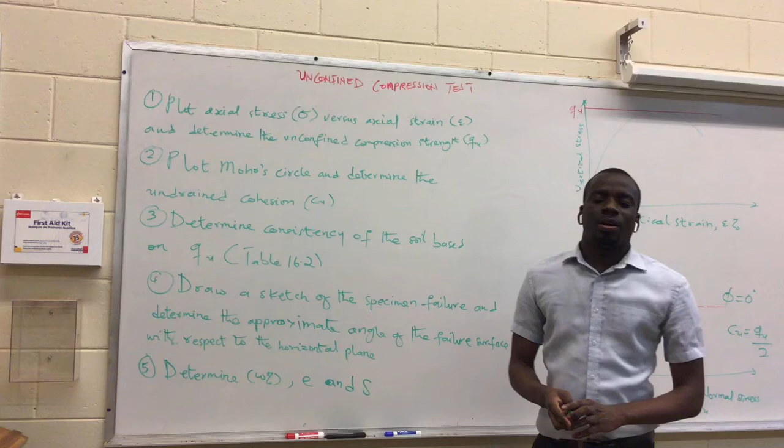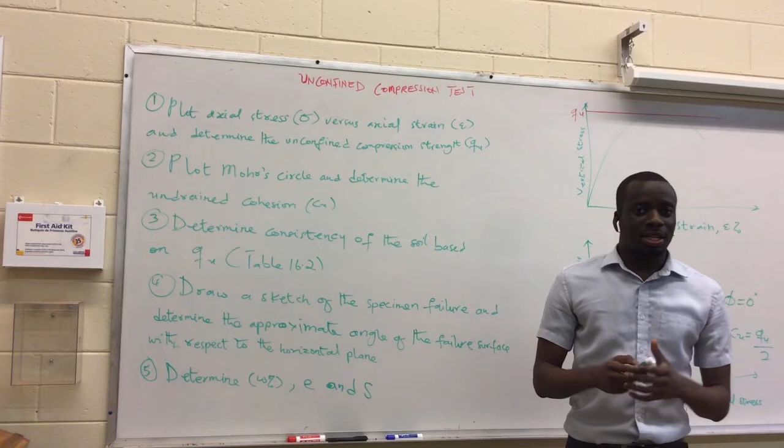Today we are going to treat unconfined compression test, and it's a modified version of the unconsolidated undrained test. So let's now go through the objectives and then get ourselves ready for the lab.

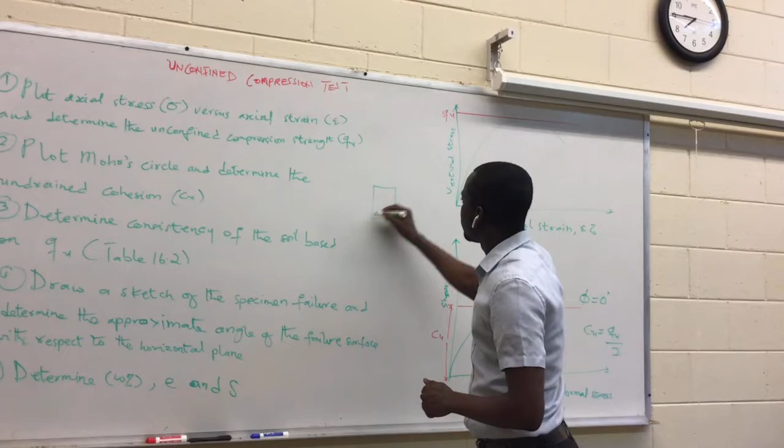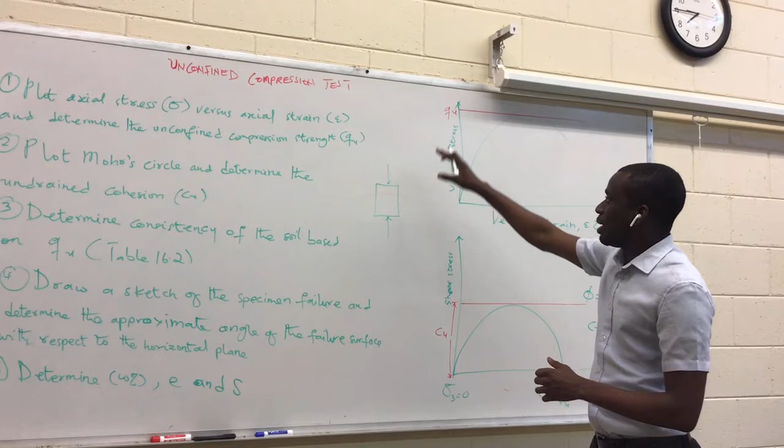The first objective says you should plot the axial stress versus the axial strain, like this. It's very simple: we have a sample that we exert a vertical pressure on without any confining pressure. Once we get that, we plot the axial stress we are imposing on the sample versus the strain it experiences. So you can see the vertical stress against the strain.

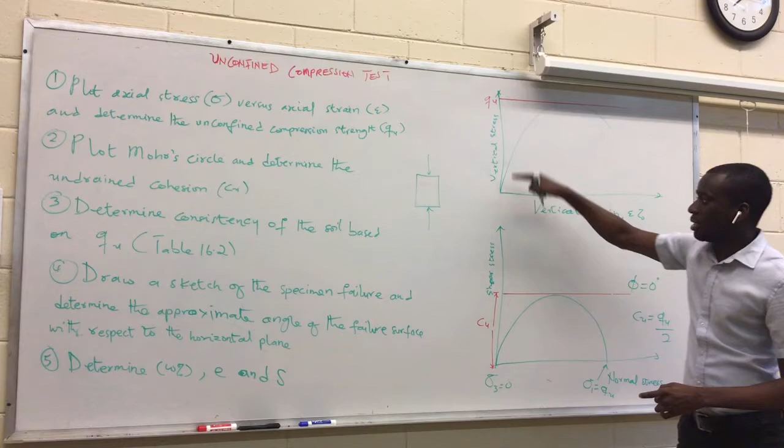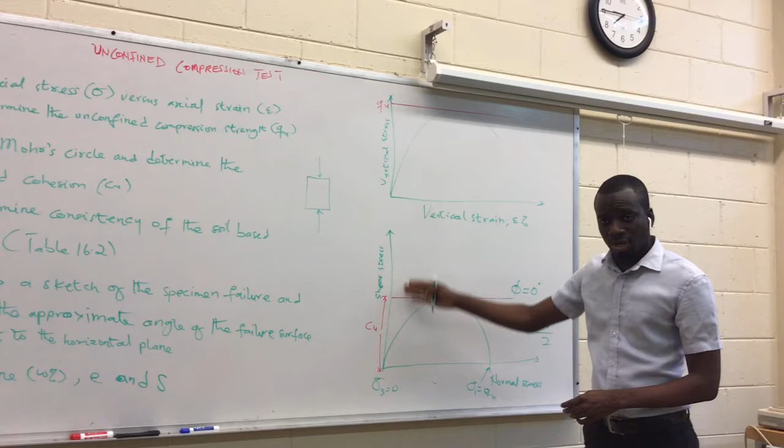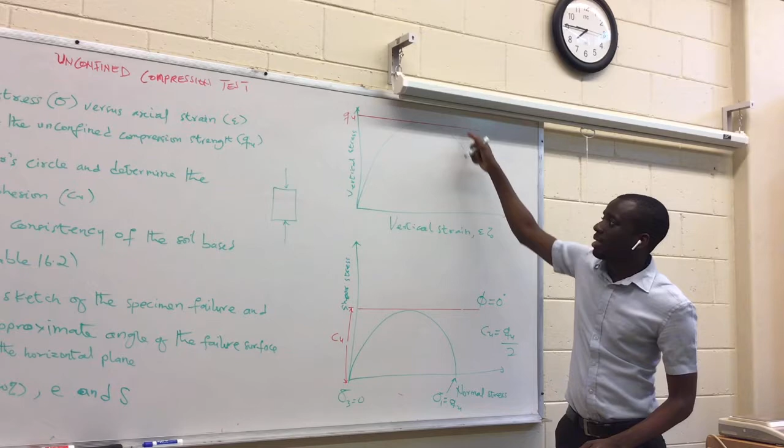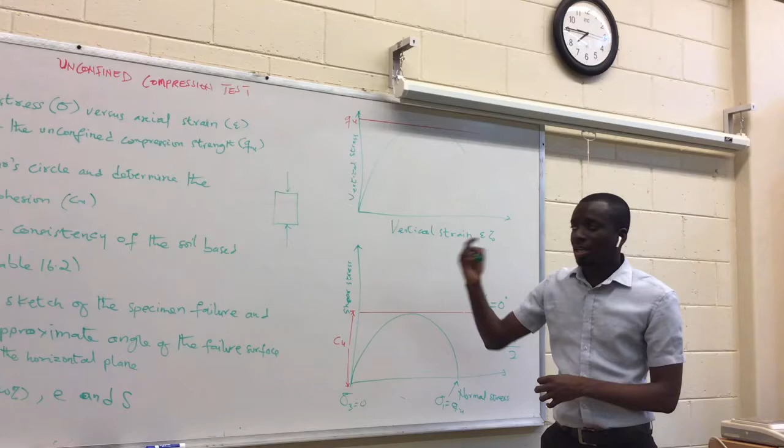Then with that, we are going to determine the unconfined compression strength, which we find in the graph of vertical stress against vertical strain. Usually the QU is the tip of the graph we are drawing, the peak of it, the highest vertical stress, which becomes our QU, or the unconfined compression strength. As we know, the strength is simply the highest stress the sample can endure before failure, that's how it becomes the peak of our graph.

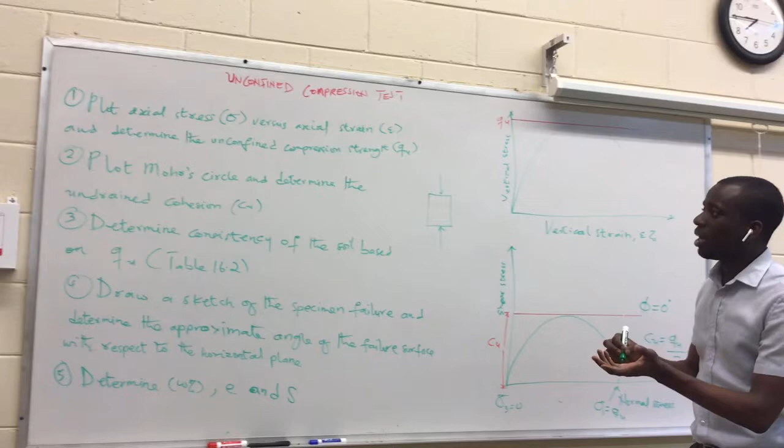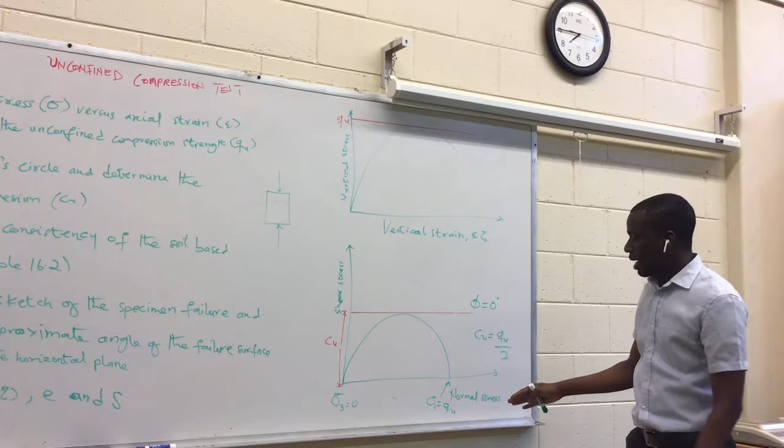Going to the next point, that's plotting the Mohr circle and determining the undrained cohesion. All you have to do is pick the unconfined compression strength, which is your QU. Then you come to the Mohr circle plot, which is shear stress versus normal stress. In that case, your unconfined compression strength becomes the diameter with which you draw this Mohr circle, because the confining pressure is 0.

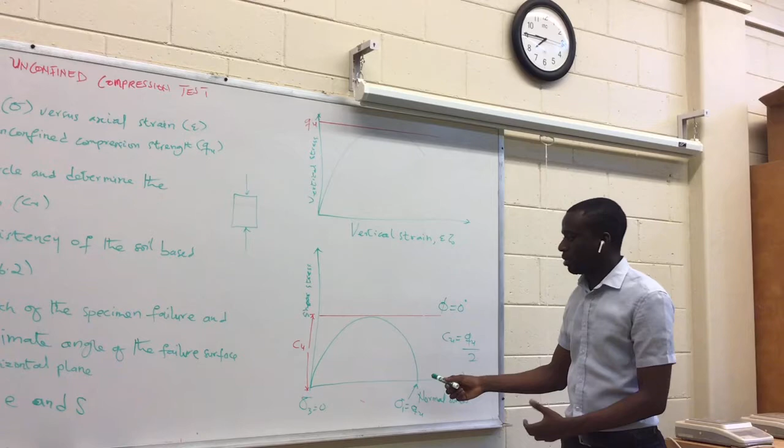That's how the sigma 3 is 0. Then this is the principal stress, which becomes your unconfined compression strength. Then you are able to draw the Mohr circle, and half of this becomes our cohesion. That's how the radius of this circle becomes our cohesion, so we just take it straight from the graph.

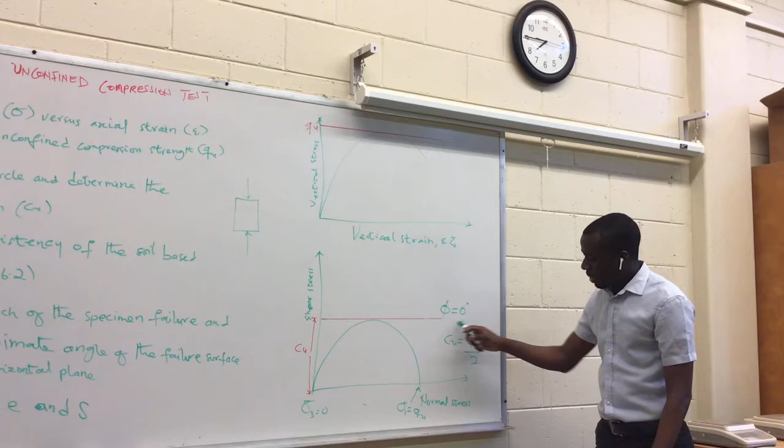This line is flat, or has a slope of 0, because the friction angle of the clay is assumed to be 0. So in this case, you have a friction angle of 0. As you can see on the board, my CU, or my cohesion, is the unconfined compression strength divided by 2, because it's simply half of that.

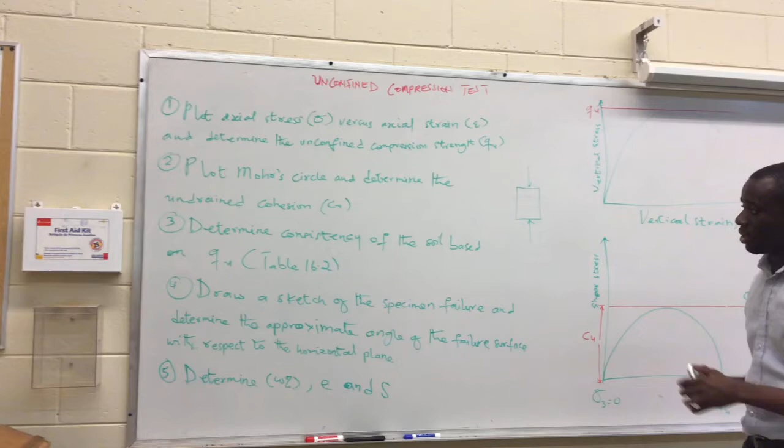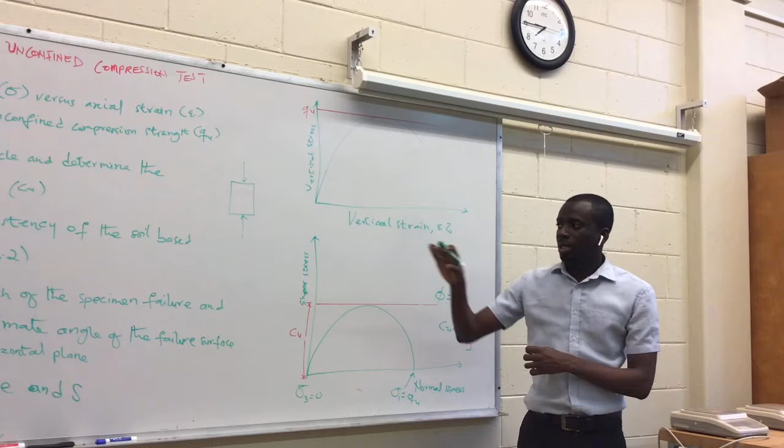Number 3 asks us to determine the consistency of the soil based on the unconfined compression strength, and there is a table that we use. You have values of the unconfined compression strength, and you match what you got to the description of the properties, and you're able to get the consistency of the soil.

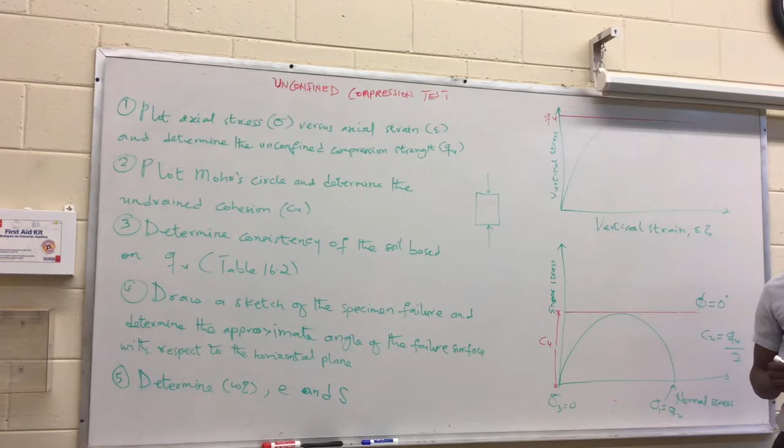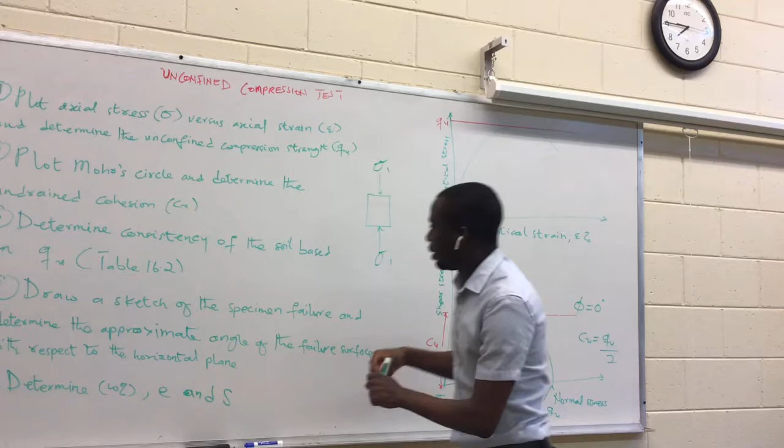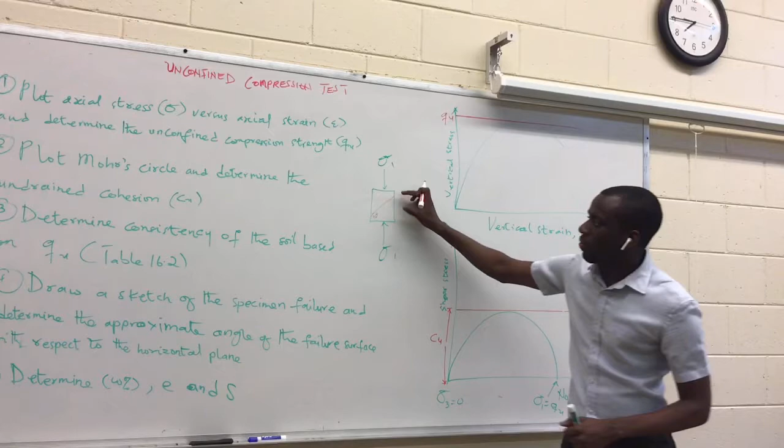Number 4 asks us to draw a sketch of the specimen failure and determine the approximate angle of the failure surface. As we continue to impose stress on this sample, it will fail along a particular line that we call the failure plane, sometimes at an angle of 45 degrees. So we are required to make sure we make notice of the orientation of the failure plane, or the angle of failure. That's what number 4 is telling us to do.

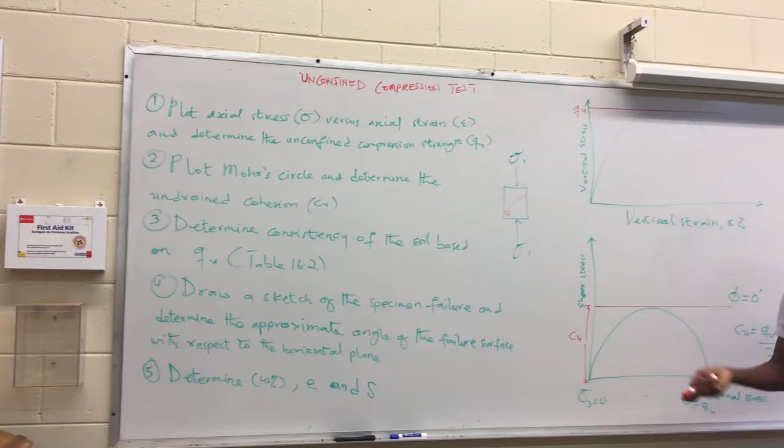Then number 5, you're supposed to determine the moisture content, the void ratio, and the degree of saturation, which we've done repeatedly in this lab. So we are just going to go along and do that as required.

Okay, so now we are at the practical section of the lab. This is my cylindrical mold, which will help me to mold the sample into a cylindrical form for us to be able to perform the test. And these are my calipers that I'll be using to measure the correct dimensions of the sample. And this is my extruder.

It helps me to extrude the sample from the cylindrical mold. This is my plastic plate, which helps me to keep the sample. Then this is my wire saw, which I'll use to trim the sample to the required shape.

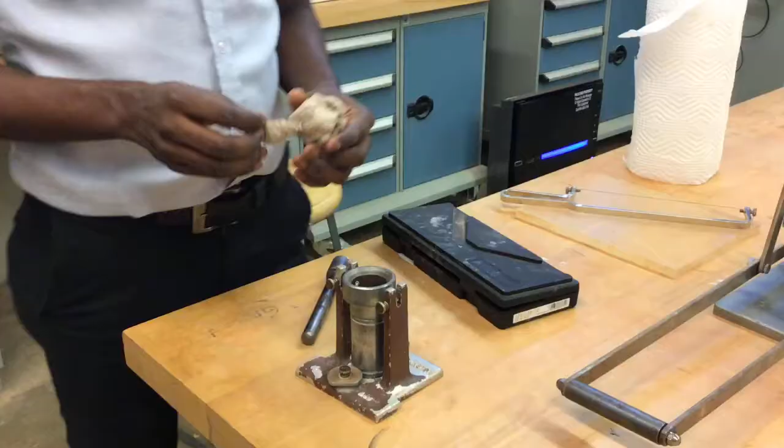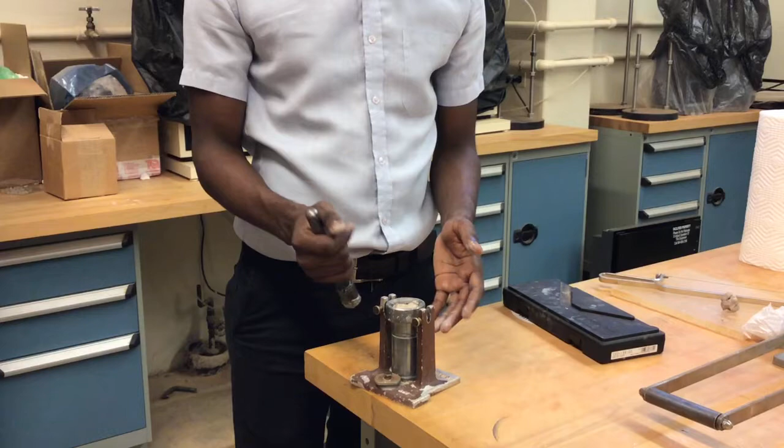Okay, so now I'm required to put the clay inside the cylindrical mold and tamp it 10 to 20 times, but in this lab we are just going to stick to 15 times. So I've already added some clay, so I'll just go ahead and tamp it. So I'm compacting my last layer, which is the third layer, and that's the same as the other layers, 15 blows.

So now that I'm done compacting the sample, we can see that part of the sample is actually extending beyond the cylindrical mold. So what I'm about to do now is to trim the sample flush with the tip of the cylindrical mold.

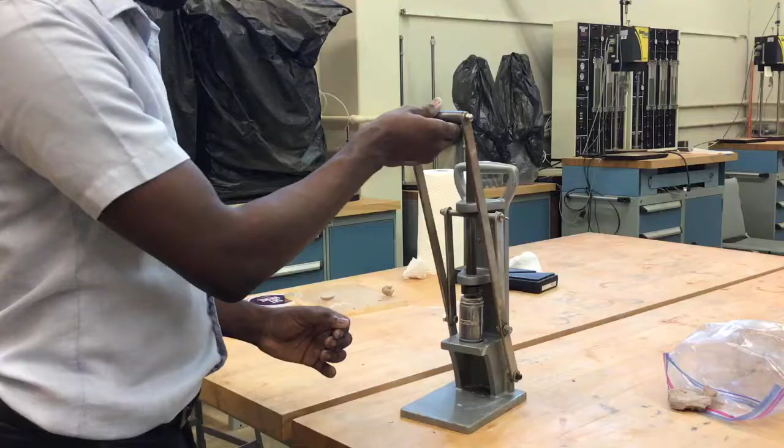Using this device to extrude the sample.

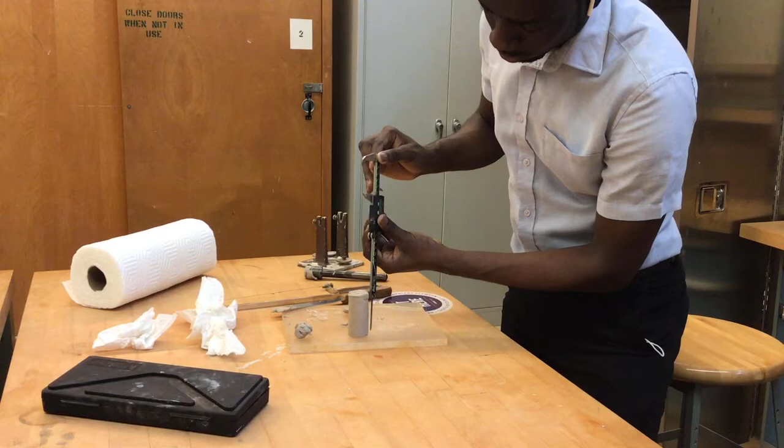So now I'm taking the dimensions of the sample. Alright, so I have my diameter. I now have my height or length of the sample.

So this is my GeoJac instrument, and then what I'm about to do now, as we've done in most of the lab, is to check to see if the instrument is well calibrated. And what we focus on are the two sensors: the deformation sensor and the load cell.

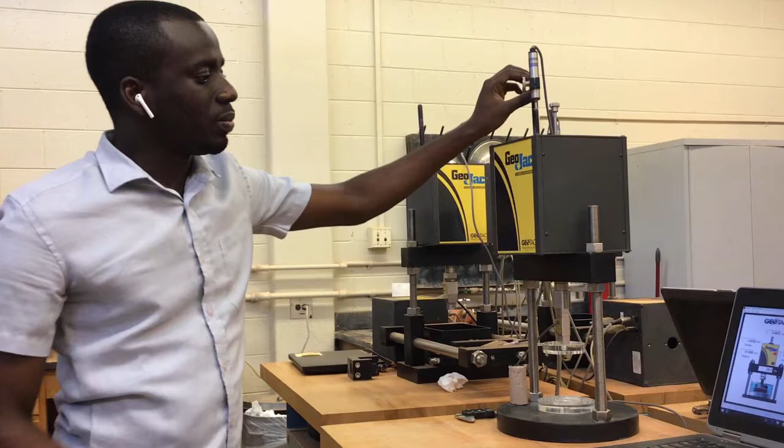So I'll check to see if it's actually zeroed, and if it is not zeroed, then we just have to go into the computer and re-zero it to make sure we bring it back to the mean position, so that any measurement we make is coming from the mean position onwards.

So we are required to make sure that the distance between the two platens is less than 2.3 inches, and I have done my measurement and I realized that it's actually correct. It's less than 2.3 inches.

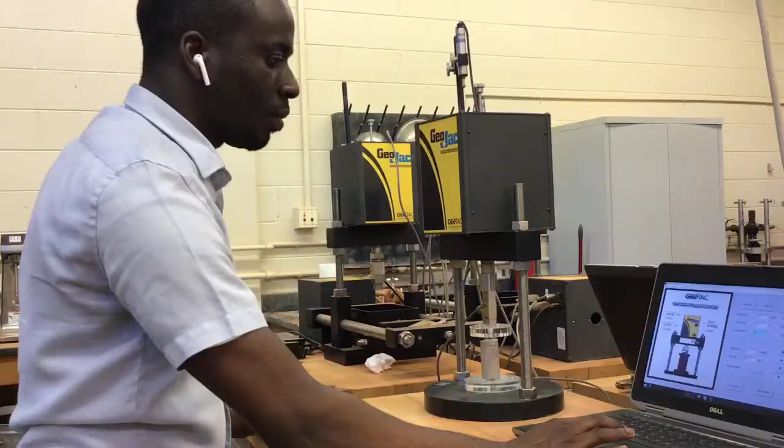So I'm showing this. As you can see, the gap is closing, and I'll stop it right when it's at the top.

Now the test is running. I've set my strain rate to 1% per minute, and then my strain limit is 15%. So it should take approximately 15 minutes for this test to be done, which means by the time I get to the 15% strain, I'm likely to get my failure.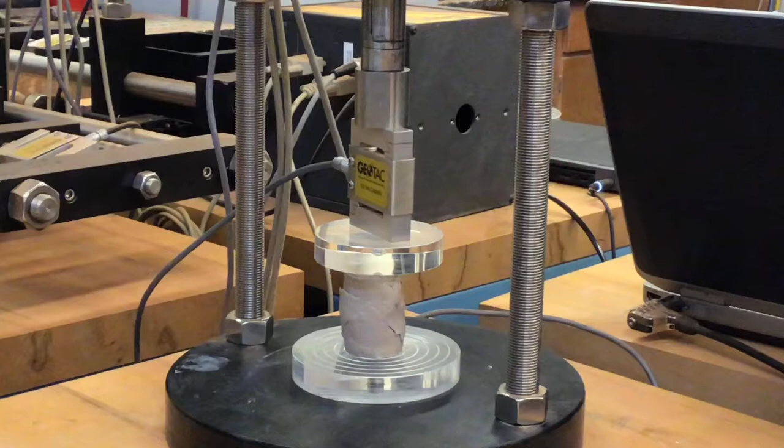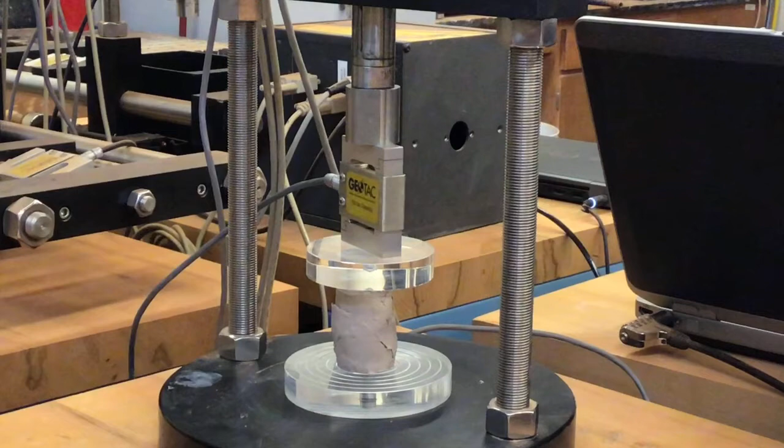So now our test is done, and as we can see, we have the failure occurring. We can see the failure, and it's like almost a 45 degree failure plane, and that's what we want, and our sample has failed.

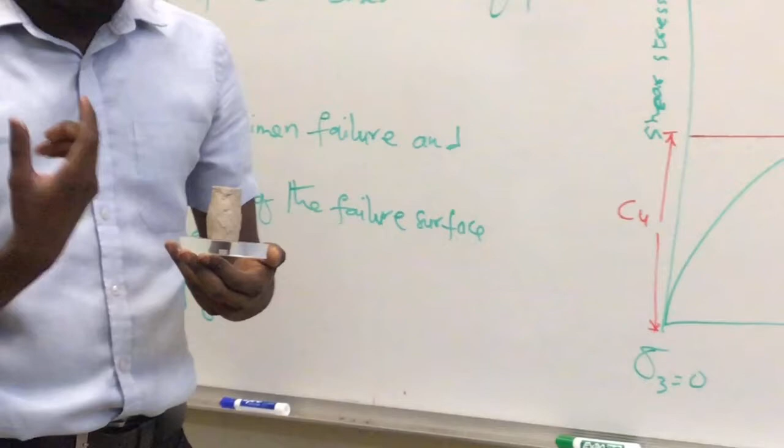All right, so now that we are done with the test, as you can see, we have the failure planes. So what we do is just use your protractor or estimate it and find the angle at which it has failed, and that's what I did at the beginning of the test by illustrating this here. Now that you are done with your test, you just have to plot the vertical stress against your vertical strain.

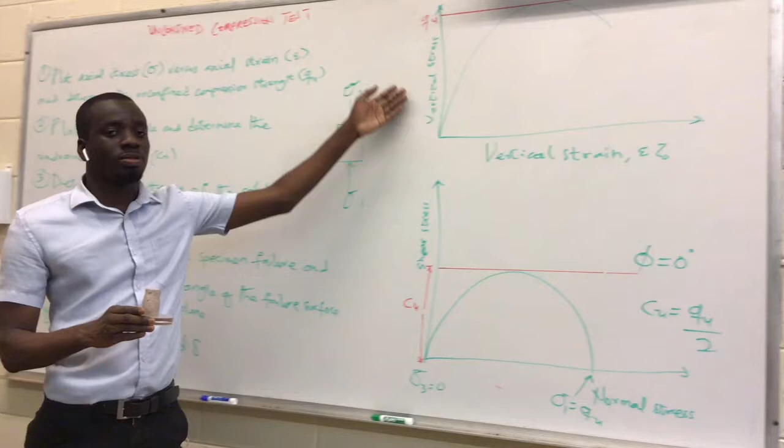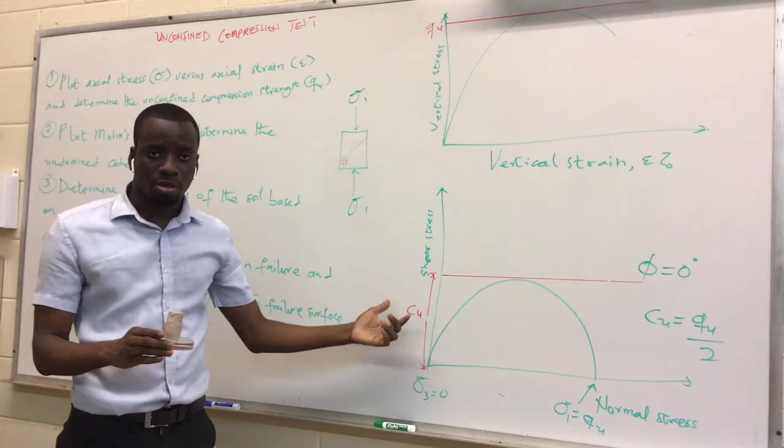And then you take the peak, and that gives you your unconfined compression strength. Once you take that, you come and plot a Mohr's circle, which is shear stress against normal stress, and the peak of that, or the half of that, actually gives you your cohesion.